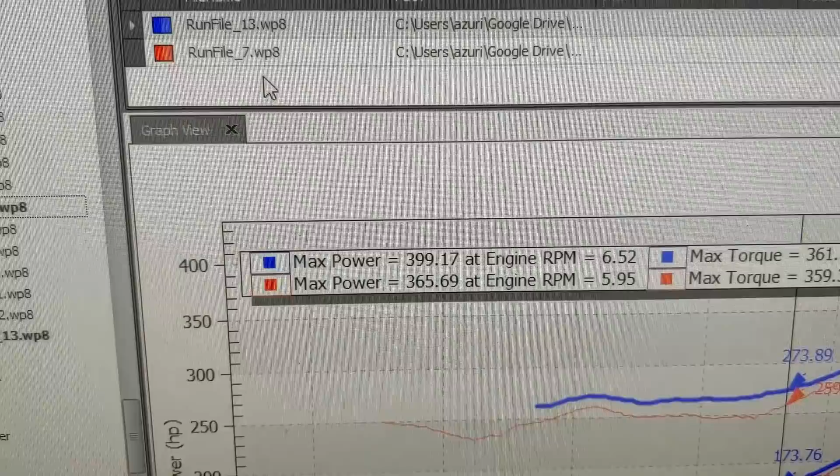In this experiment, we've already gotten this car, we've already fixed some issues on it. It came to us with a broken valve spring on it and some other goofy things that needed to be resolved, and we did do that. We ended up putting down just shy of 400 rear wheel horsepower, which was pretty cool, and that was revving all the way to 7,000 RPMs, and it made it pretty much right up top. The cam probably would have kept going.

It did plateau, but it would have been a broader power band than normal, the factory redline 6,600. It would have probably revved out to about 7,400, likely for a pretty high shift if you wanted to, but again, it already plateaued at just shy of 400 rear wheel horsepower. And now we're going to see what happens when we throw a smaller cam in it.

Now the C5 Z06 is a fantastic car. It's powered by a 5.7 liter engine with 243 heads. This one is a 2001, which factory comes with 385 horse. The 2002, 3, and 4 come with 405 due to a change in camshaft. We're not worrying about that because it already has a giant stick in it. Again, we don't know what it is.

And what we're going to do now is I'm going to show you an evaluation of the car on the street. It pulls well. It won one race and lost one race to a Mustang GT with the 5.0 in it, and we're going to see if we can increase those odds with a smaller camshaft. When we first got it, we did find a broken spring, so that kind of sucked, but after fixing that and a couple other things, we still have a big cam car, and it still drives like shit.

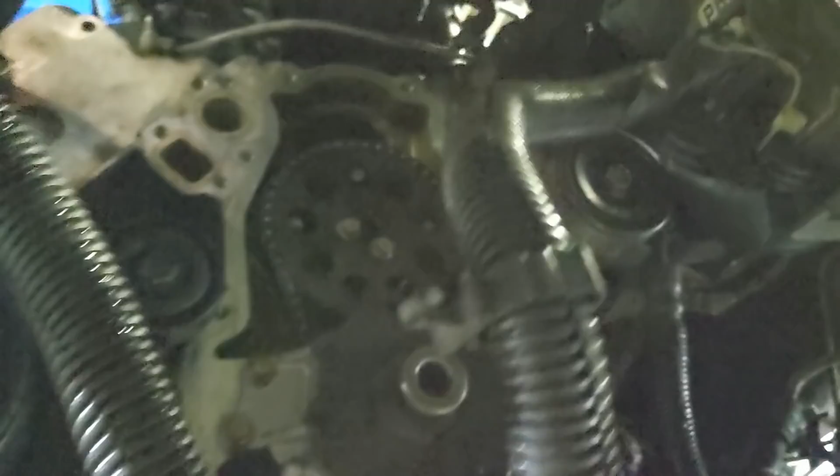That was quick. It's noon and we are down to the camshaft. But the only problem is I don't have the replacement camshaft. It will be here tomorrow, Wednesday. So we're gonna have to pivot to something else at the moment, but we did get our custom grind for this car that we are gonna throw in and see the power difference. But we're kind of boned at the moment.

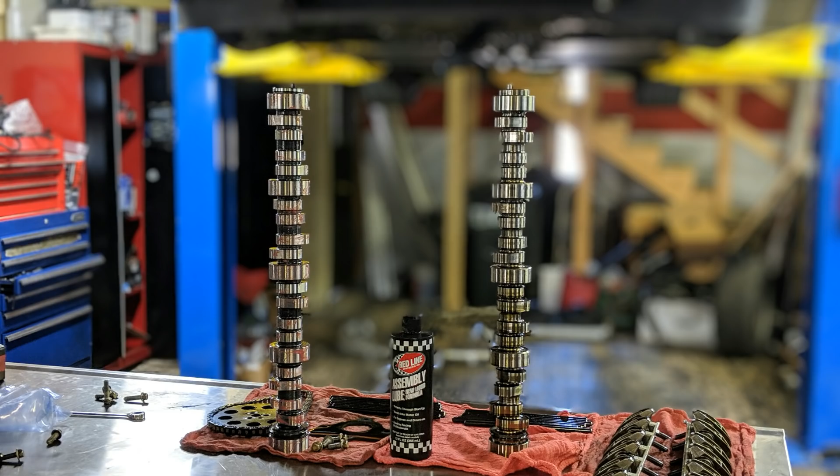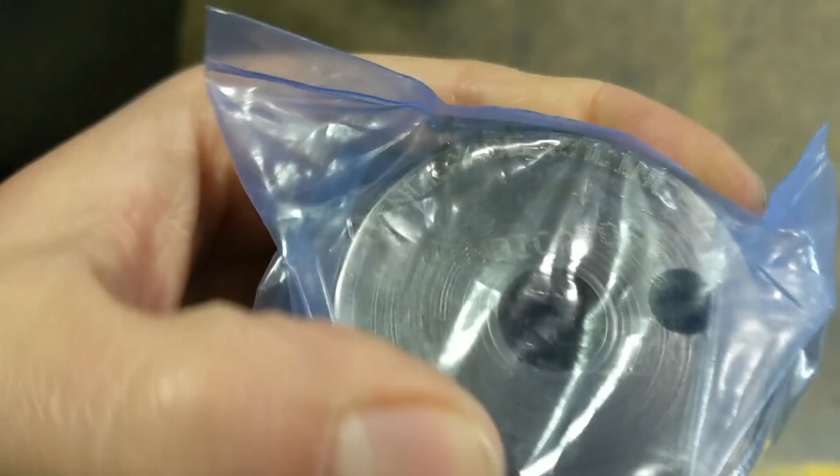Oh, wait. So let's see what cam came out. It's kind of hard to see through the plastic, but it's a Vengeance Racing Vindicator. Whatever that means. Are the specs on there? No, there's just a number. Here, let's find out what that number is. That definitely sounds like a big camshaft. 240, 244, 112. Yeah, that's big for a little old 5.7.

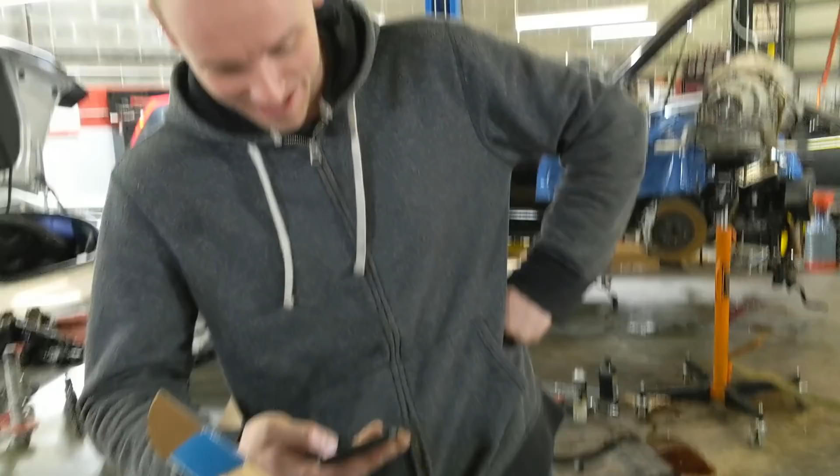Yeah, that's way big. I bet you the small cam makes more power. I bet you 2,800 to 7,000. Bullshit. It did go to 7,000. Well, yeah, but it ain't no 2,800. It's like 3,500. Yeah, that's a big difference. I'm kind of excited to hear how she sounds.

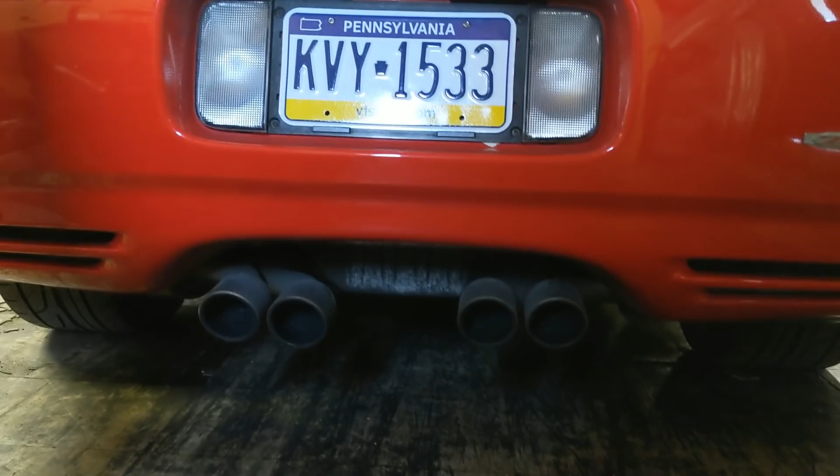So here it is, the C5 Z06 with the smaller camshaft. Oh, that sounds so disappointing, doesn't it? But it might not be. We're gonna find out in a second what kind of power she puts down with a 225, 235 camshaft versus a 240, 242, which has no business in a 5.7 liter engine. So, any bets? Let's find out.

Bets? $1, Bob. Okay. What did it make before? This is where you're supposed to say $2, Bob. Oh, then you get throat kicked. I'm guessing $4. Shut up, Josh. Thanks. Well, I don't remember what it made before.

It made 399. Oh yeah, just under 400. No, this is a smaller cam. Yes. You get 382. Okay. Honestly, it's probably gonna make like 407. I'm going with 410. Really? Yeah.

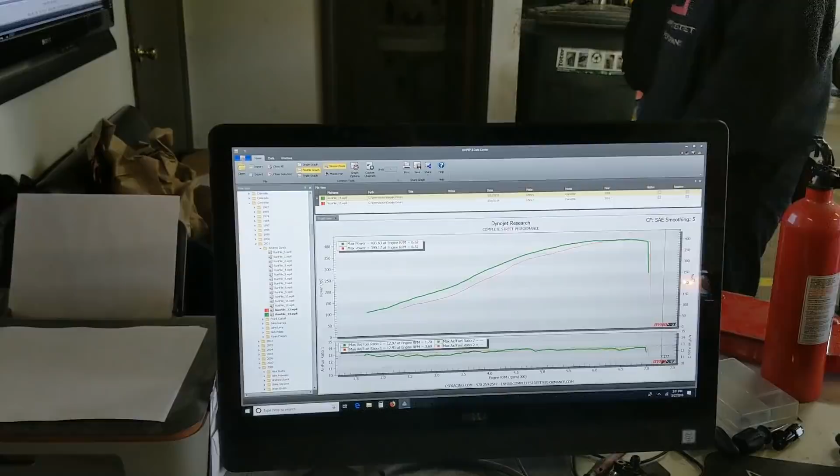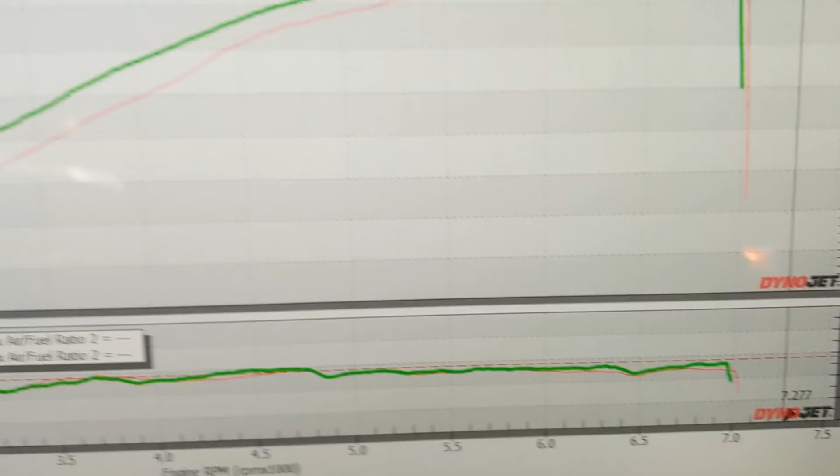So here it is. First pull, we've gained 4 horsepower. And look at the gain throughout the whole power band at the same air-fuel ratio. Let's see what the torque looks like. I bet you we're at like 380. Oh, no, where is it? Torque, 388 foot-pounds of torque.

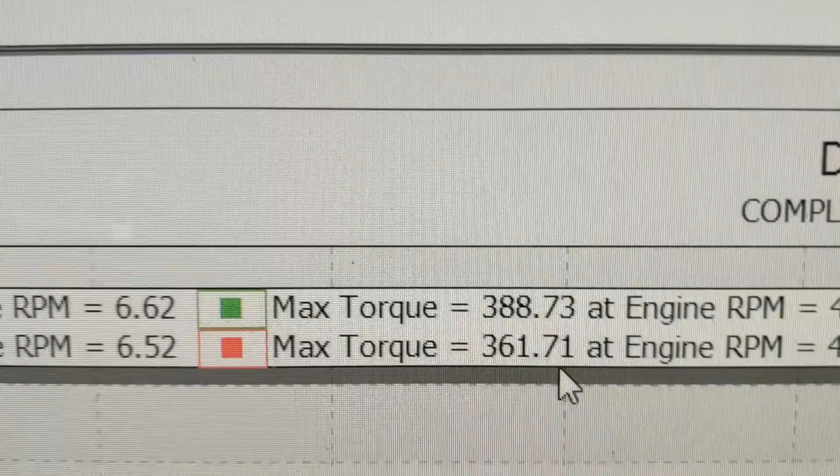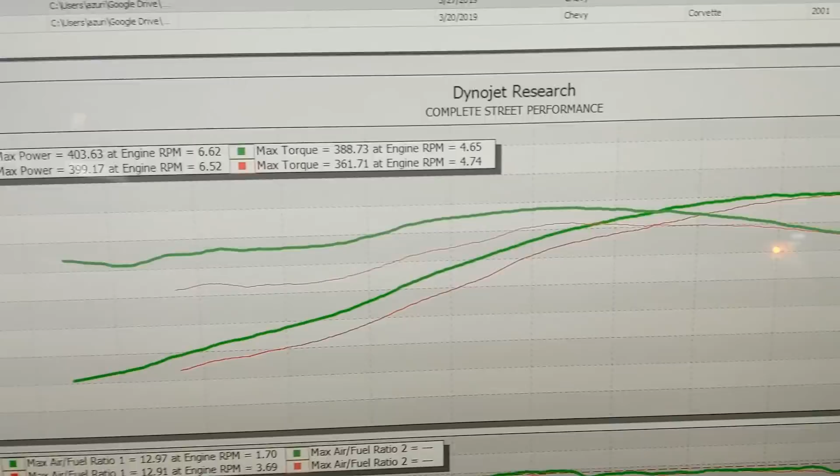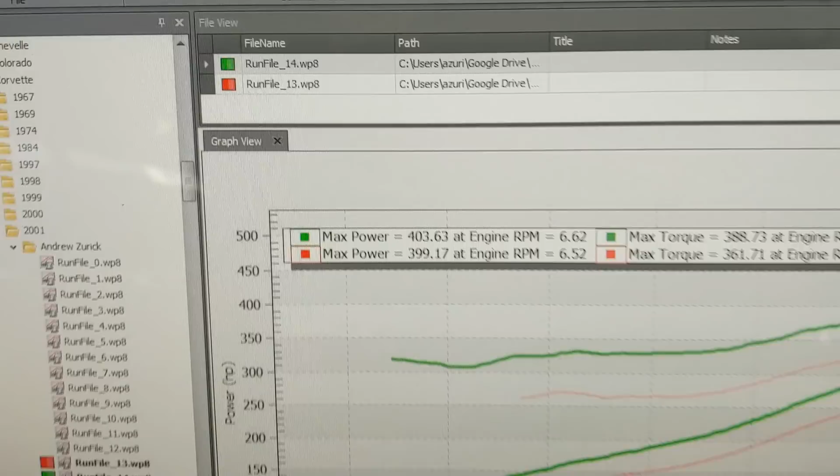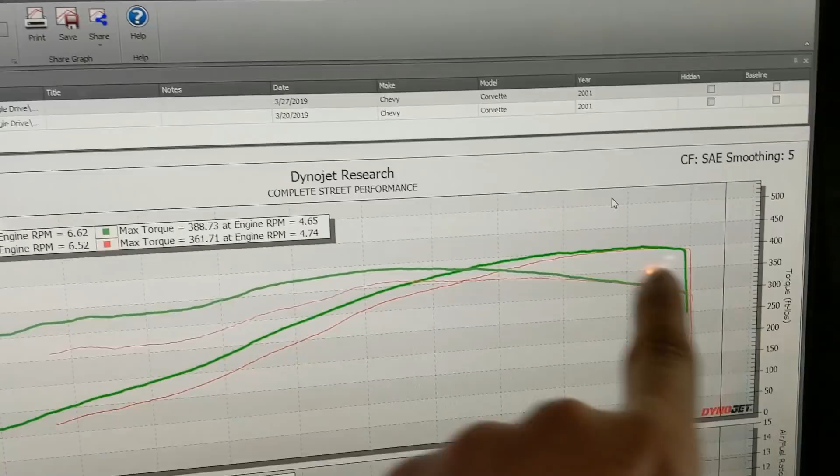This is over cam, the red one is definitely over cam. That's the 240, 242 camshaft. Good in the high end, but better for maybe, I don't know, 50 RPMs than a much smaller camshaft. This is why it's so important to size the cam right for your engine. This is something that people just don't understand. Look how broad that is now. Now we have a beautiful, broad, usable torque curve. Let's see if we can get some more power.

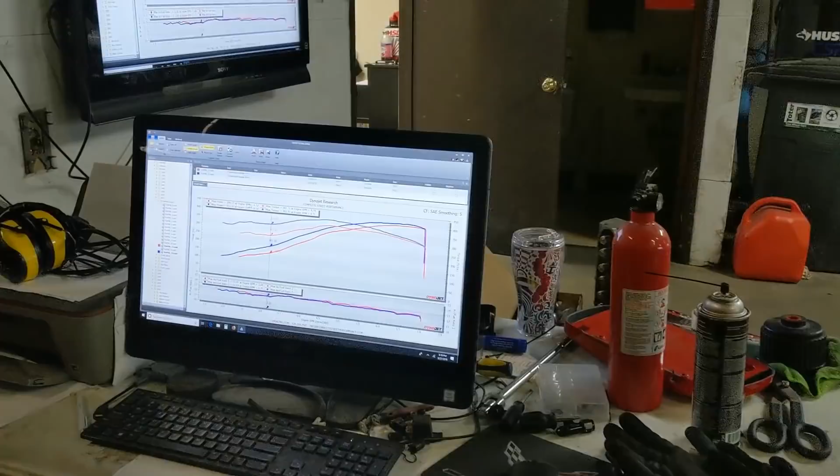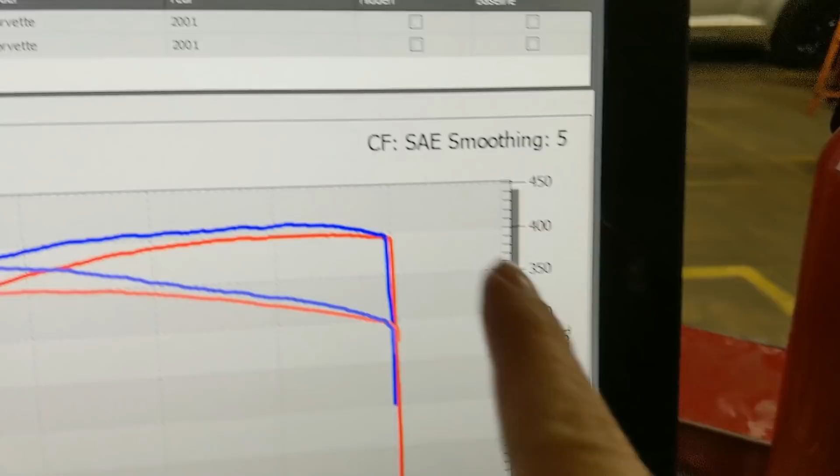Okay guys, here are the final numbers. 411.7 to 399.17. You can see there is nowhere that bigger cam makes more power. And that's likely because the dynamic compression ratio is much lower and it just sucks. It's really not set up for the car. But our grind here makes more power everywhere.

393 foot-pounds, that's awesome. And then look at this. Down low here, I mean, that's an incredible gain. What the heck is that? That's like almost 70, what is that, 65-ish foot-pounds of torque? It's power everywhere.

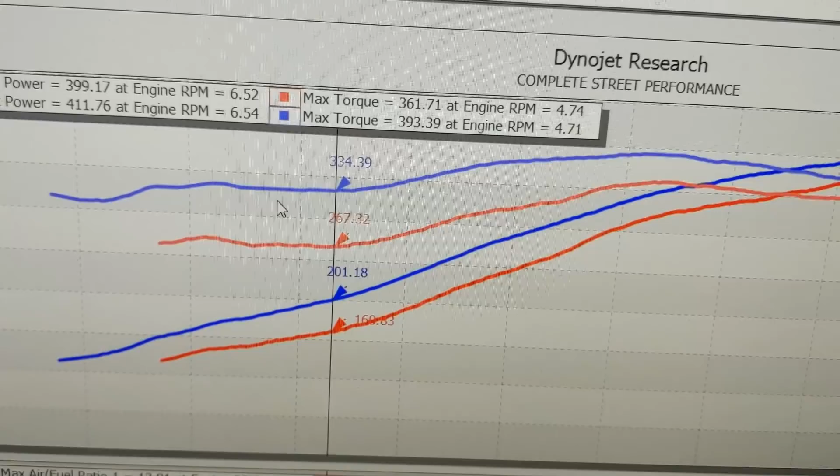So when we spec cams here, we do a 5-point process that basically covers everything that we're working on about what you want. So if you wanted it to be more high-end, yeah, we can deliver that. We wouldn't deliver the cam that was in it, the monster camshaft. We would deliver something like this if you were looking for broad power, great drivability, and this is with stock heads.

I can't wait to see, do I want to do heads? If anybody out there wants to throw in a set of ported 243s, I'd be interested in putting those on and seeing what she does. But usually I know it's going to be somewhere around 450 to 470 rear wheel horsepower with this setup. So, you know, I knew what we were getting into.

I can't lie. I knew that this big camshaft was not going to perform anywhere close to a smaller camshaft in a 5.7 liter. That's just what it is. So when you guys are thinking about ordering your donkey dick camshaft, think again, because you're probably going to be slower than the guy that ordered something a little bit more mild.

Everywhere. Slower everywhere. Let's get her out on the street now and see how she drives.